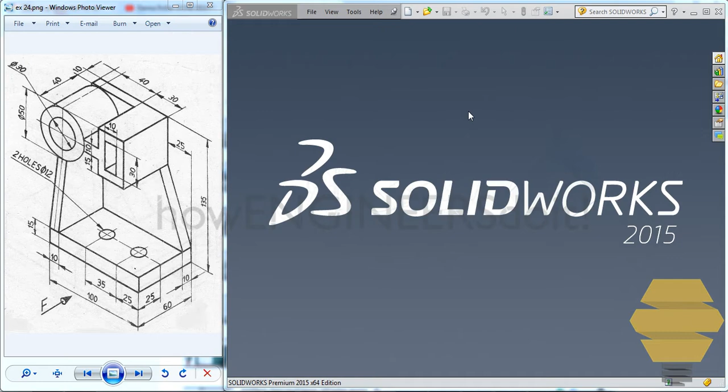In this video, we'll work on exercise number 24. To start off, let's open up a new part template, and let's start sketching by selecting the sketch tool in the sketch toolbar, sketching on the top plane. I'll use a centered rectangle.

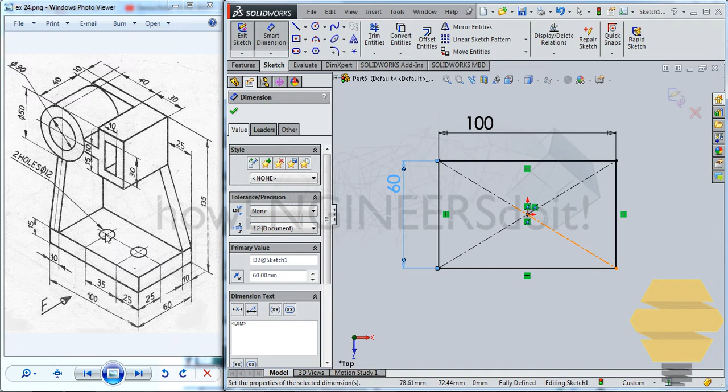Let's start dimensioning the rectangle at 100 and 60. We'll also create these two holes here, 1 and 2, and dimension that hole. The dimension of the hole is 12 diameter each, and it's at a distance of 25 each from both of these edges.

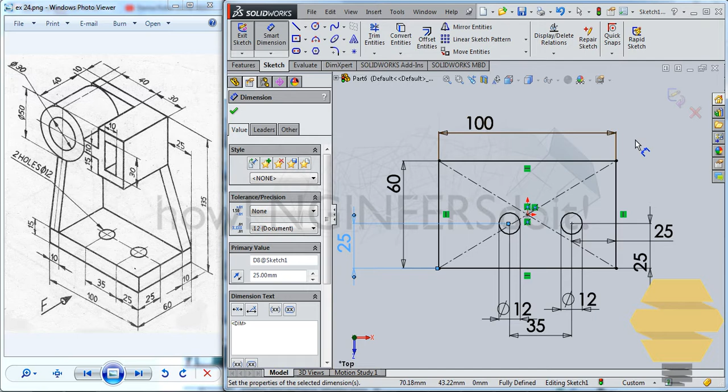This is at a distance of 35, and 25 here. Now it's fully constrained, as we can see that the sketch is in black color.

Exit the sketch and then go for extrude boss and base, and give this thickness as 15. Double enter will confirm. Now let's do this particular portion of the part.

As we can see that this is resting on this face here, so let's do this completely on this face, or else let's create this common portion. So let's consider that we are creating this portion here.

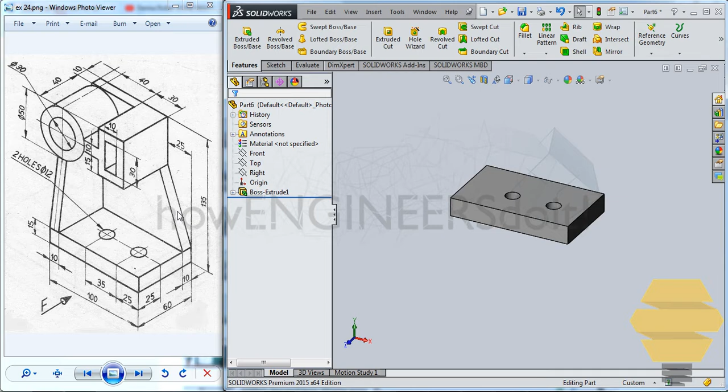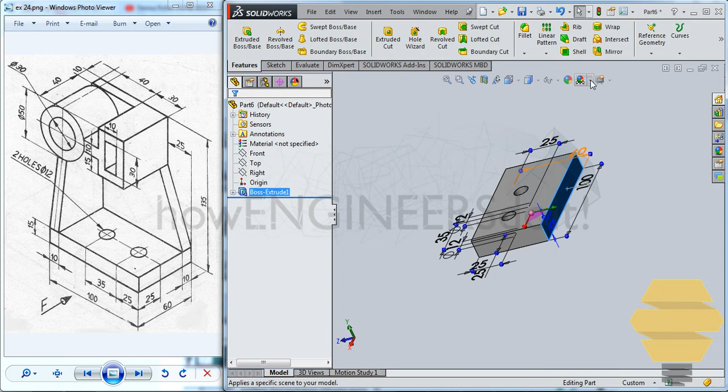We'll have to create a plane that is resting - create a plane, flip offset at 10. So we have a plane here, and we're going to select that plane. Let me just confirm that. Oops, something is wrong, let me repeat that step. Click on the plane, go for reference geometry and plane, flip offset, and give 10. Double enter will create that plane over there.

Now click on that plane and start doing the sketch. Control 8, and zoom out a little bit. Use the control middle mouse button to pan a little bit, and let's start doing this profile here.

So that's two concentric circles and then two rectangles - we'll create a normal rectangle, 1 and 2, normal rectangles. Now let's start dimensioning that circle and rectangle.

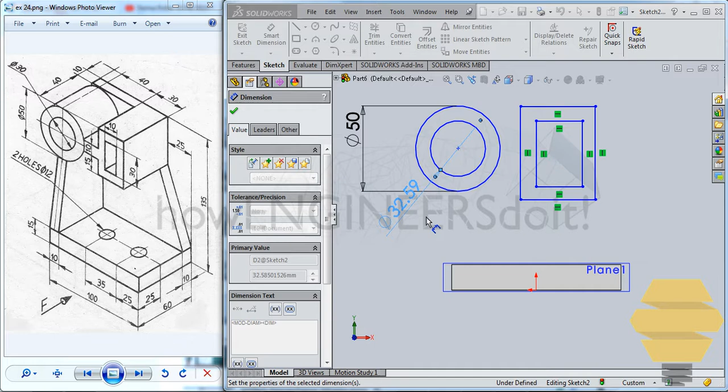That's diameter 30 and 50. Now we have to dimension this portion, that's 30, and this total height should be - I'm assuming it should be 50, because as we can see that this is aligning with this circle which is of diameter 50.

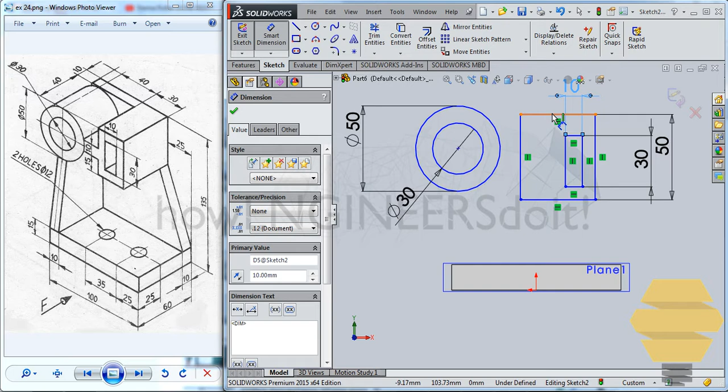Now we have this portion that is 10, and this portion is 30, and the center of the circle is at a distance of 40 with the edge. And as we can also see that this circle and this edge is tangential.

And what else? Also this is 30, so 10 - this should be 10.

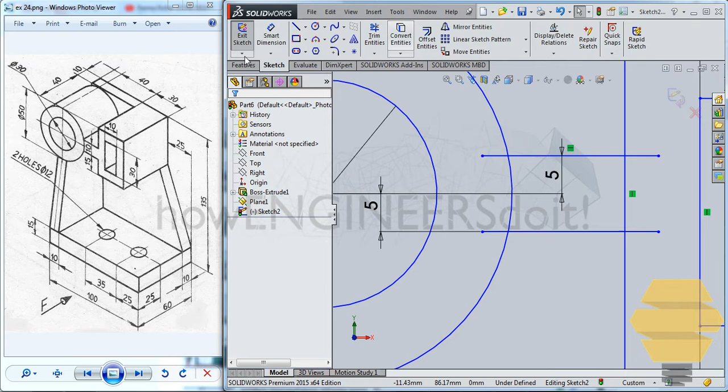Now we have a channel here, so we'll create a line here, and that line is at a distance of 5, and we'll create another line just like that, and we'll set that distance as well as 5. We'll use the trim entities, and I'll just trim this portion.

Now we have this portion completely created. Now we have to place it somewhere so that it'll exactly show us if there's any other constraints that need to be done. So as we try to move this now...

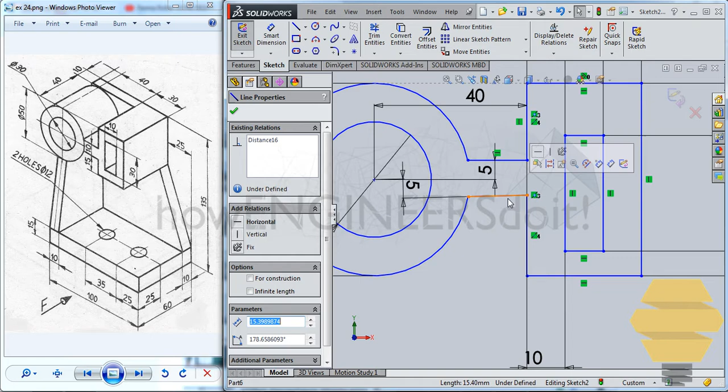Okay, so we have to give a little more constraints. Let's just select this line here and give horizontal, and let's see something else. Okay, you can see that this is not constrained, so that should be 10 here.

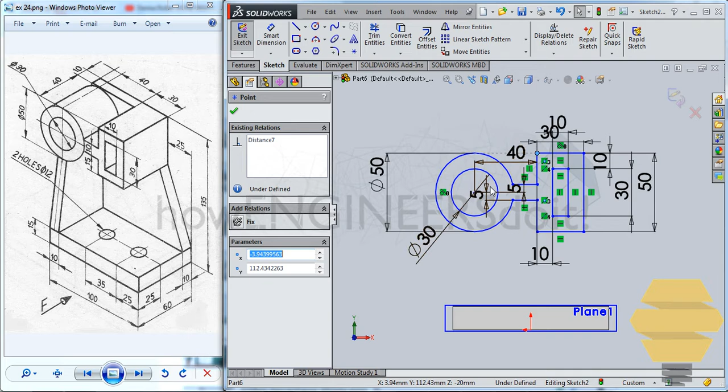Now let's see if there is anything else. Now we can see that the sketch is fully moving, as I said. So we have to place this sketch somewhere, and then try to move the sketch so that we'll be able to find out where exactly we have missed any sketch, if at all we have missed any constraints.

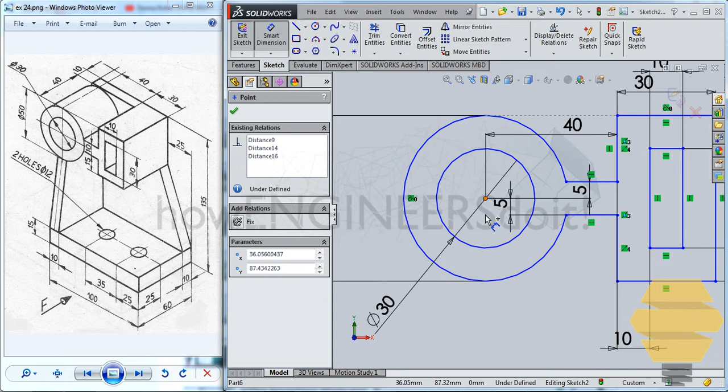Now, alright, now we can see that the center of the circle is lying at this particular face, so that should be 5. Okay, let's just select the center of the circle here, and select this edge, that should be 5. Alright.

Now some of it is constrained. Now let's see, there should be some vertical constraint. Okay, that's 135. So from this bottom of this portion to this top should be 135.

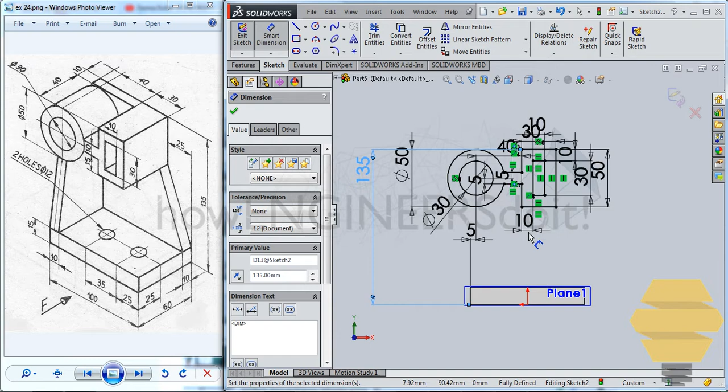Now if you try to see, it's fully constrained. We can see the black colored sketch, which is uniformly black, so that means that there's no other constraint that I've missed out. Let's exit the sketch and go for extrude boss and base, and reverse direction.

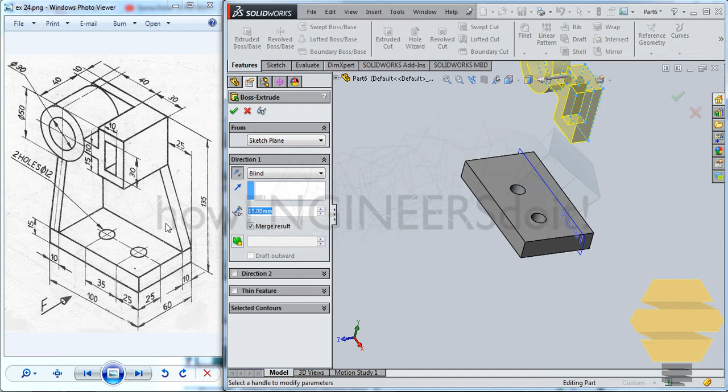That should be reverse direction, and this should be 40. Should be 40. Double enter. We'll confirm that. Let's just try to pan a little bit, and now we have to create this portion here.

So we can basically select this face here and go for the sketch and press Ctrl 8, and now what we can do is, okay, I'll just put a straight line.

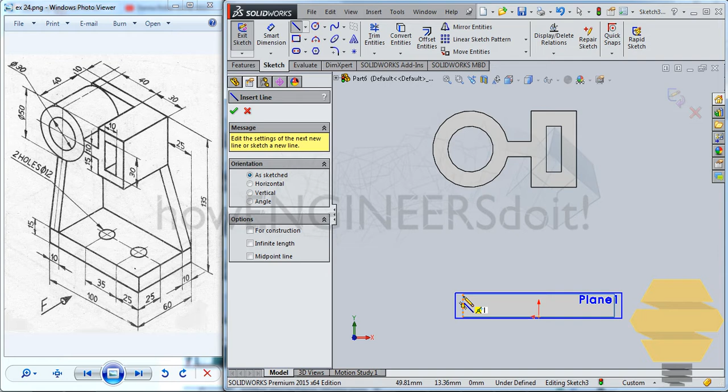I'll just put a straight line here. Okay, now I'll put a straight line from here as well. Right, now, okay, I'll just extend this and...

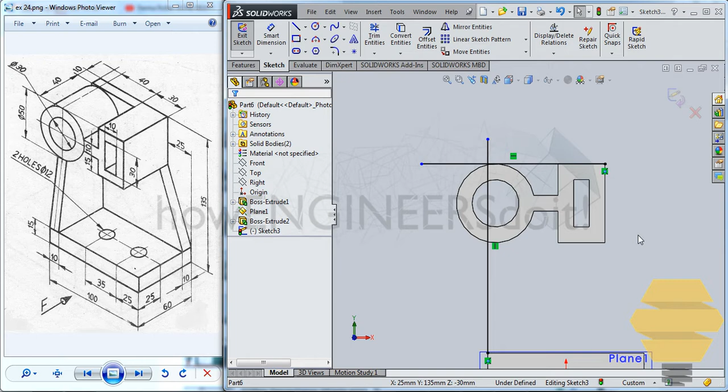Remove this and extend it to this portion and put this line here and continue and place a point here. Now let's use the trim entities and trim this portion.

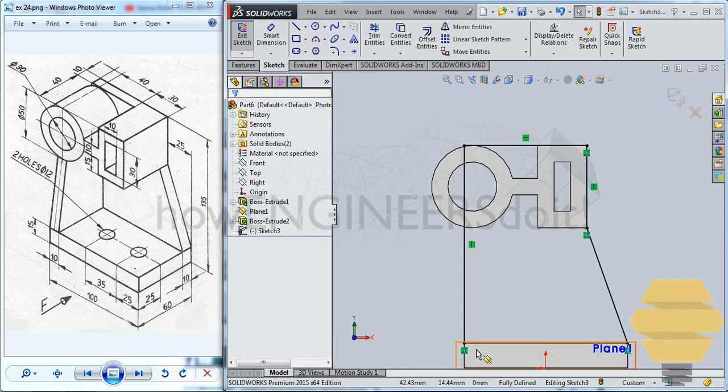And finally, I think we'll have to just convert entities and just try to see that if the sketch is fully constrained. It's fully constrained and it's black, and also it's a closed sketch.

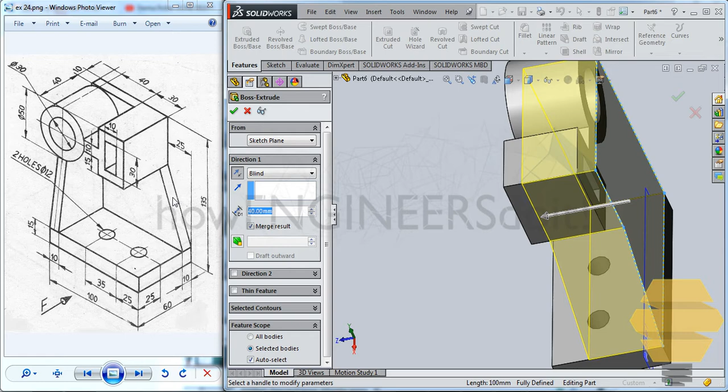Now let's exit the sketch and extrude this in reverse direction at 10 thickness, and that will close that portion there, as we can see that.

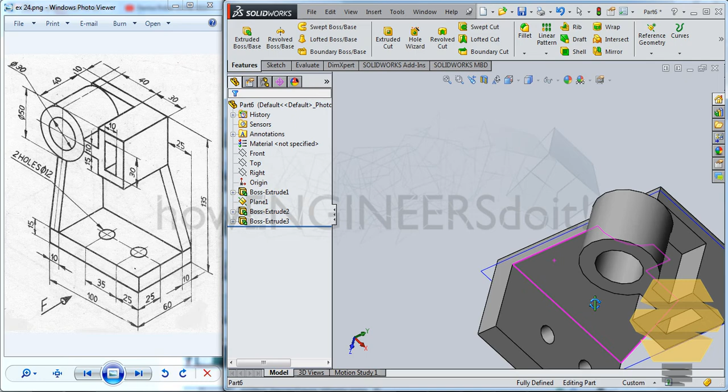Now we have to create this portion here. So to do that, let's select this face here and go for sketch, Control 8, and now we can create a line here from here, and let's keep it a little inside.

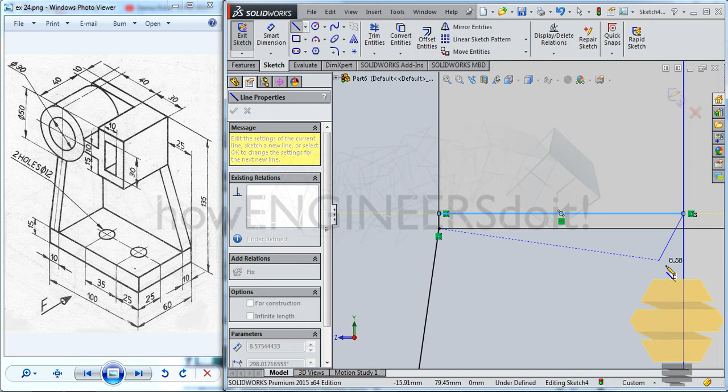And the reason being that if we don't keep it a little inside, what happens is there will be some portion which will not be filled. So I'll show that to you once I just complete the sketching here. So don't forget about this. Don't worry about this particular constraint. Let it be blue, it doesn't matter.

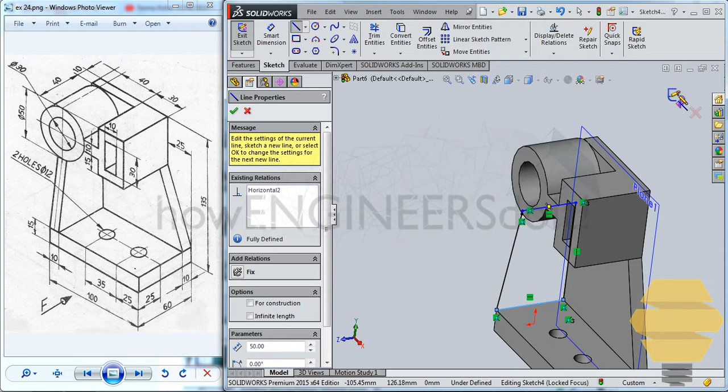Now exit the sketch and try to do an extrude, and that should be in which direction? Opposite direction with a thickness of 10. Double enter will do it, and yep.

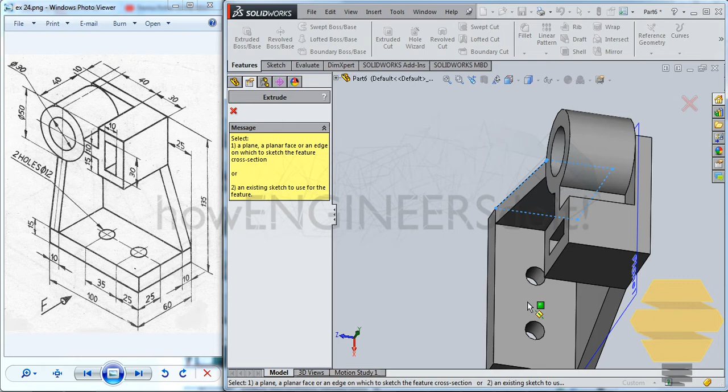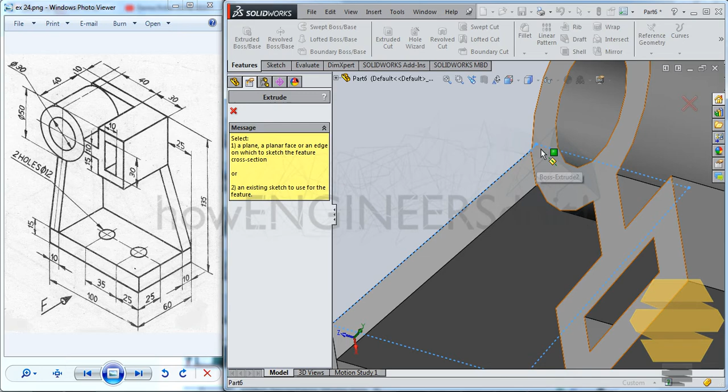So that's about this particular video. And so what I was talking about was, if I had just not made it a little inwards, then what would have happened would be like there would be an open portion here. So to just close that, or to just minimize that effect, I'm just putting the sketch a little inside and then just padding it. So you can try that without putting the sketch inside and trying to pad it, and you'll be able to see what is happening if you don't do that step.

So that's about exercise number 24.